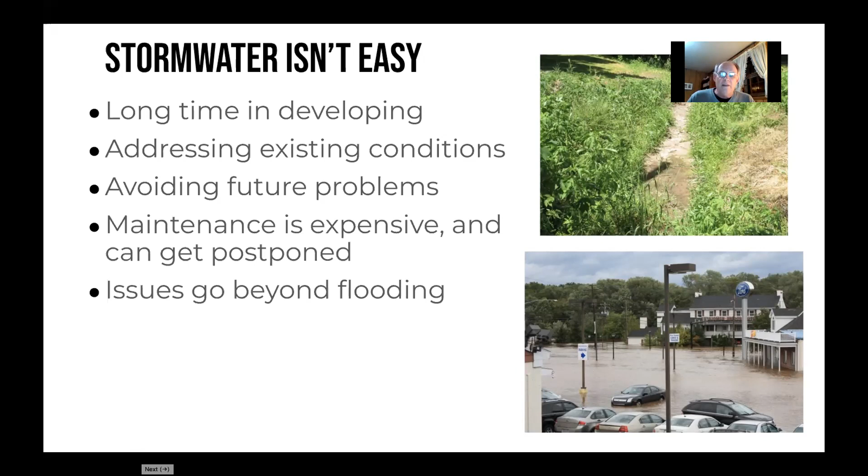And the issues go beyond flooding. The bottom picture there that you see, it's an unfortunate situation. Cars are in the floodwaters, buildings are in the floodwaters, but it goes beyond flooding and gets to the very hydrologic cycle, that water cycle that we all learned about in high school. The top picture is a stream. It's a small headwater stream, and there should be water in it, but there isn't because we're disrupting the water cycle with all of our impervious surface and the disruption to the land. And so we're creating a problem that's even bigger than just stormwater. Next slide, please.

So what is the problem? Let's get down to a basic question. What is stormwater? So we're all on the same page. We're talking about rainwater that runs off the land during and just after a storm. Can it be a nuisance? Yes. When flooding occurs, when our basement floods or the backyard is wet and mushy, yes, it can be a nuisance. Can it be a threat? Yes. When roads flood and emergency vehicles can't get through, or people can't get home from their jobs or get to where they're going, it can be a threat. And sometimes people drive through flooded areas and disasters happen.

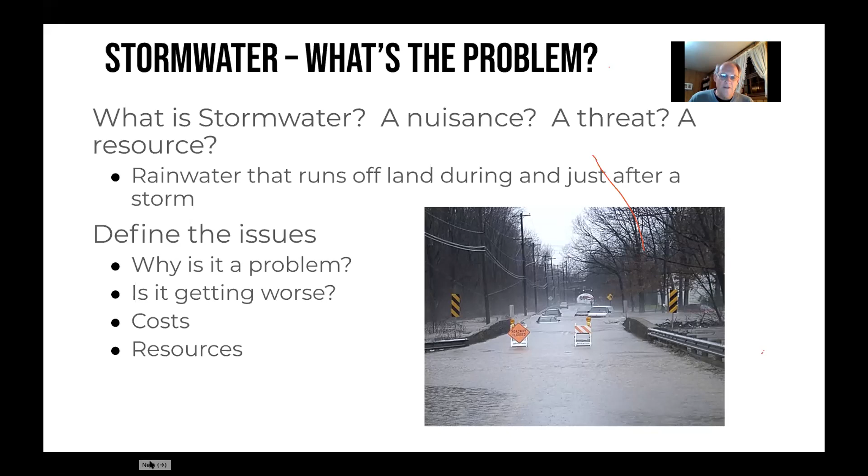So we can have some real problems relating to stormwater. But it's also important to realize it's a resource. This is the water that recharges groundwater, that keeps our forests alive, that ultimately becomes our drinking water. So I want to talk a little bit about why stormwater can be a problem, is the problem getting worse, and the costs involved. And on my last slide, I have a few resources for you to consider once we're done with the presentations. So next slide, please.

Right, these 4 pictures show a transition between the forest, I'm not sure where that red line came from, to an urbanized environment. Keep your eye on the horizontal arrow. That's signifying runoff. When rain falls on the land, it can go in 4 different directions. It can evaporate back into the atmosphere or be transpired through leaves of plants back into the atmosphere. It can soak into the shallow soil and be held in the spaces between the soil. Or it can soak deeply into the ground where it recharges groundwater, or it can become runoff.

In the forested situation, about 10% of what falls on the land can become runoff. As we move from that forested situation to a rural development, which is really low density, even so, runoff can double. We can have 20% of the rainfall running off the land from the hard surfaces that are represented by rooftops and driveways and roadways and sidewalks and so on.

Moving down to the suburban style development that we see so much of in Montgomery County, now runoff is about 30% of the rainfall. And this, again, is coming from all of the hard surfaces, even the lawns that developers put in. They're compacted, they're smooth. So everybody wants a nice looking lawn, but those lawns don't infiltrate a lot of stormwater, and it all runs off and becomes about 30% of the rainfall.

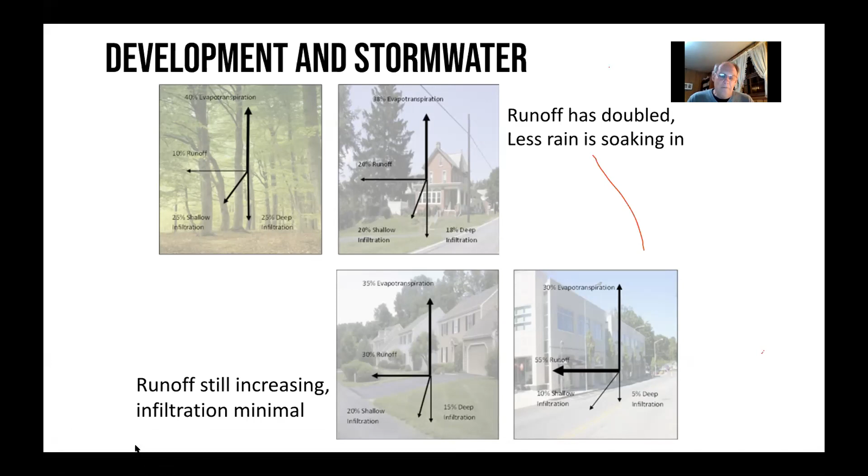I have an illustration. If you're not good with arrows, this should help. Keep your eye on the little red dot. This is a portion of, I think, Upper Dublin Township outside of Ambler Borough. This picture was taken around 1969, 1970s.

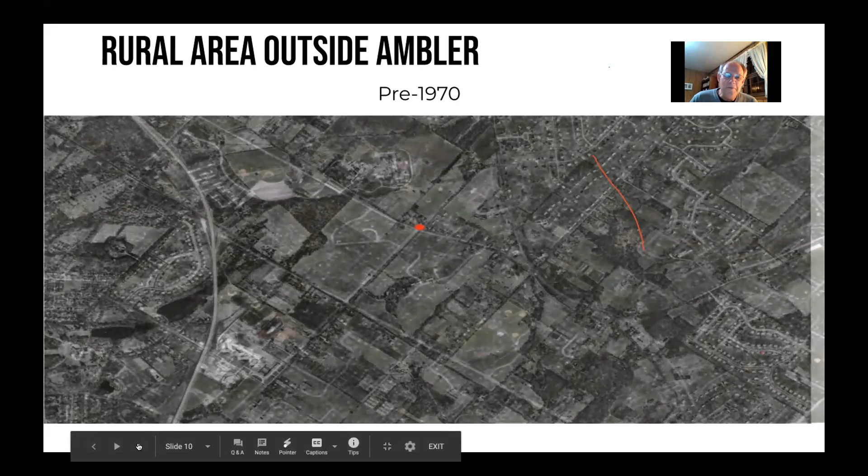Watch, it'll turn to our developed landscape that we see, and all of those roadways that appeared, all of those parking lots and rooftops and so on that appeared. They all generate stormwater. They all prevent rainwater from soaking into the ground, and they become runoff.

So the result is periodic flooding. It can be nuisance flooding, like road floods, roads being closed, or it can be catastrophic. We've had some tragic events in Montgomery County where people have been swept off of roadways or trapped in buildings, and they've died from floodwaters. And so flooding is nothing to be taken lightly. It's a very serious situation.

Let me just take a moment and ask you please never to drive into a flooded roadway, because disaster can happen. So we have loss of services, loss of property. People's yards get washed away, buildings get damaged, and the threat of loss of life. Even our emergency response personnel, when somebody gets stranded, they're there to help, but they're putting their lives on the line, and it's dangerous.

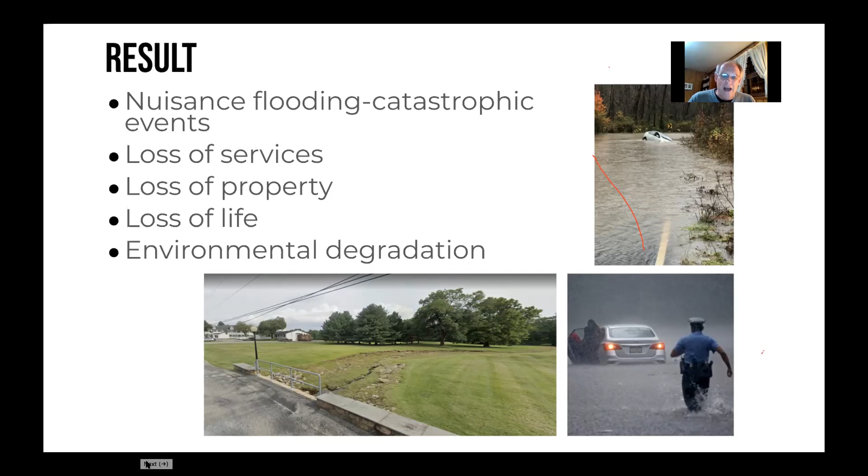That's not a healthy environment for anything. The fish, if there's anything that's living in there, they're stressed. There's no trees to shade the water. There's no vegetation on the banks to hold the banks in place. It's just a degraded environment.

Okay, so the question is, is it getting worse? I hear people all the time talk to me at work and they say it just seems like we're getting worse rainfall events. And they're right.

This map came out a few years ago. It shows from 1958 to present, the increase in heavy rainfall events. And that's my lifetime, I was born in 1959. So this is something that I've experienced, everyone's experienced. Look at Pennsylvania, 71% increase in heavy rainfall events during that time period. So it is getting worse, and we are seeing more flooding. It's not just your imagination.

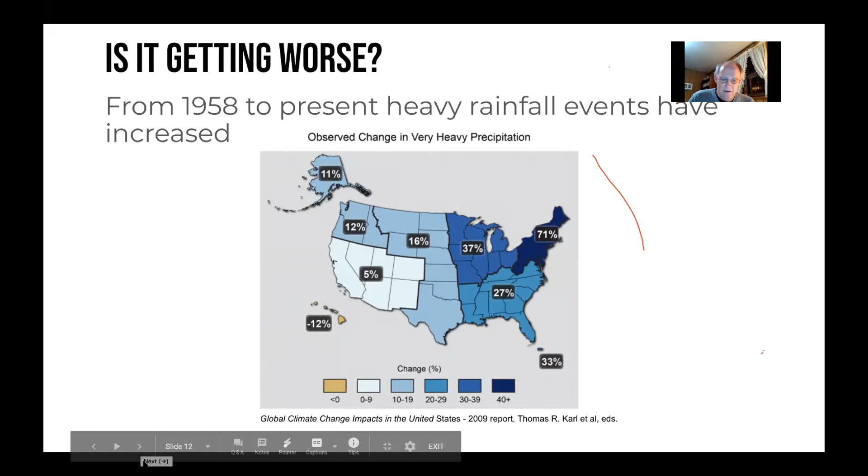And we all see these events. If you've got a smartphone and you're on some notification device, when a storm comes, your phone's going off every 5 minutes telling you about a flash flood watch or a flash flood warning. We see rainfall amounts on forecasts. Then after the storms, the media shows pictures of destruction, roads being washed away, culverts being undermined.

The PEMA, the Pennsylvania Emergency Management Agency, did a study a couple years ago and found that $125 million in damage was caused to public infrastructure by severe storms. That's not private property, that's public infrastructure. And nearly half of it was not covered by federal disaster aid.

So who covered that cost? Well, the local governments, local agencies, but ultimately you and I covered a fair amount of that with our tax money. And that's money that literally is down the drain. I mean, we could avoid that cost with some good solid planning.

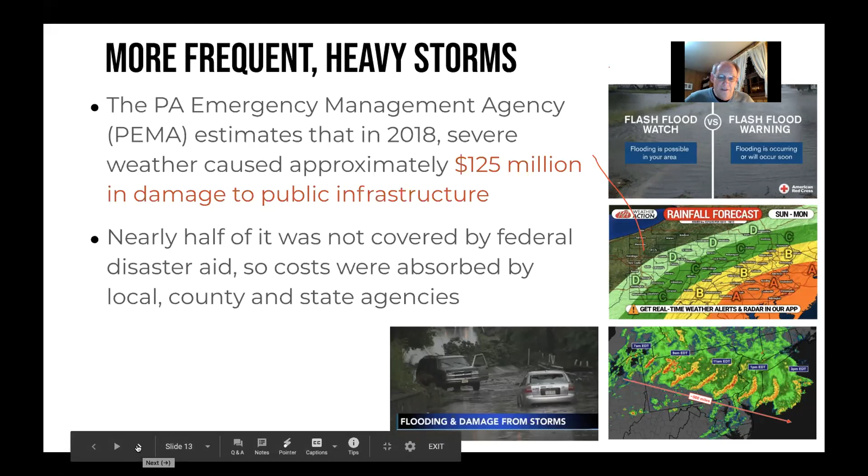More on the cost of stormwater. It's not just the facilities—they have to be inspected, they have to be maintained. Storm drains need maintenance; if they clog up, that'll result in flooding. New facilities need to be installed to correct problems as they come up.

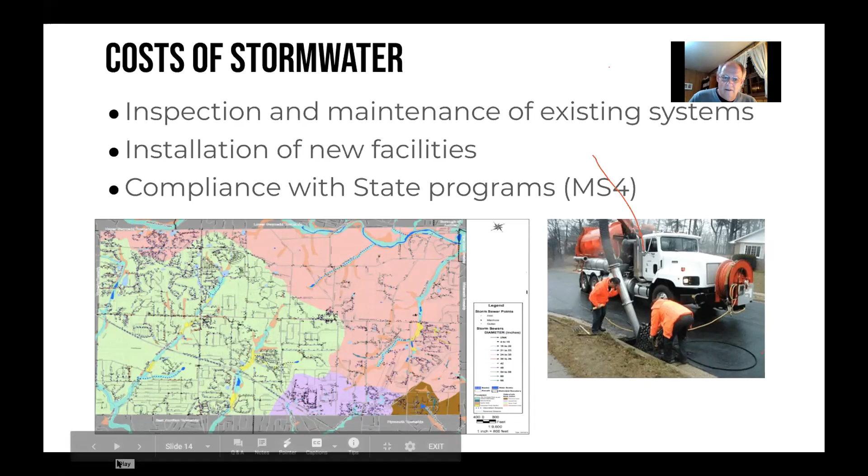Now, when I talk about costs, people always ask what's a rule of thumb. And I found there's no rule of thumb. You can't say it costs so many dollars per gallon of stormwater treated or whatever, because everything is different. The situation is different, the physical characteristics are different, and it's very difficult. But I have some cost figures here to give you a general idea of what we're looking at.

The EPA has looked at their MS4 program and found that developing the program across the country cost municipalities over $600 million nationally. That's an average of $140,000 per municipality. Now, of course, a small borough like Green Lane Borough or Red Hill didn't spend $140,000, but places like Abington Township or Lower Merion Township probably spent a lot more. And the annual cost of maintaining their program is approaching $1 billion nationally, which works out to about $230,000 per municipality. So it's an expensive program just to manage stormwater and meet certain requirements that the state is imposing.

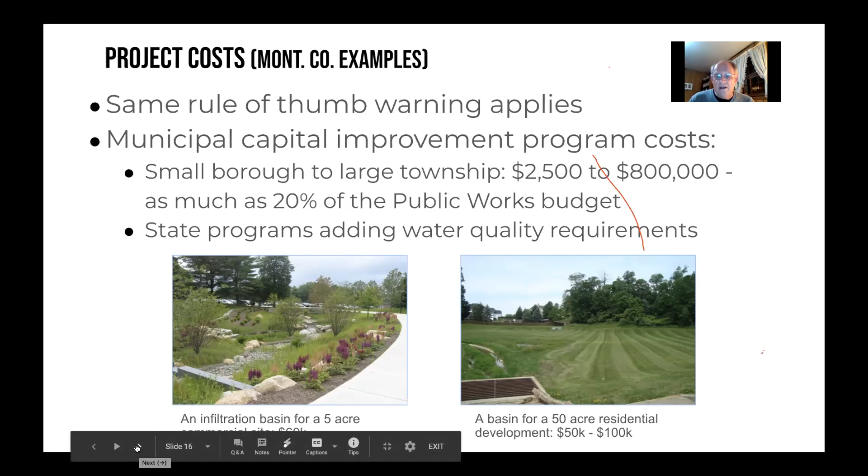To give you an idea of some projects, the bottom left picture is an infiltration basin for a 5-acre commercial site, and that costs about $60,000. The basin on the right is for a larger residential development, and that can cost up to about $100,000. So if a municipality is looking to correct the problem by merely putting in a basin, you can run into the tens or hundreds of thousands of dollars depending on the project.

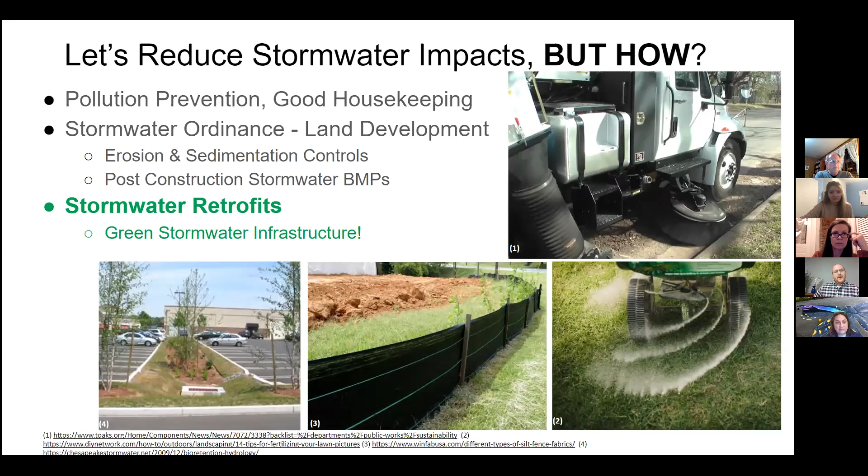But a lot of times these are out of our control. We might not want a lot of development, and we might not have control over the construction conditions. So for residents—and there are quite a few residents on the call—retrofitting is an option. You may convince your municipality, or you yourself might retrofit solely for the purpose of stormwater management. This is not based on land development; this is to improve the water quality and reduce flooding in your neighborhood.

So stormwater retrofits—commonly the term that is promoted for stormwater retrofits is green infrastructure. What I'd like to do is just present a few types of green infrastructure that either at the municipal level or the residential level are feasible to do. And to be honest, I have a great time building them and designing them for work.

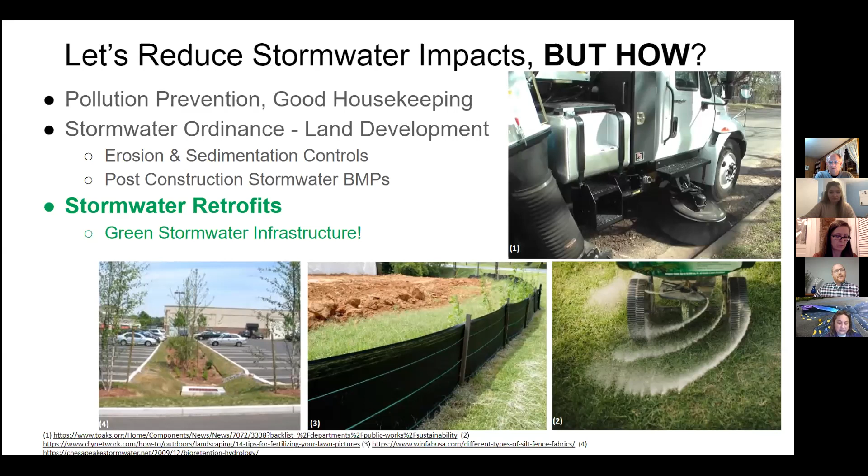So in these images on the slide, like I mentioned, street sweeping and reducing some of your fertilizer use—these are controls where we reduce the pollution in the runoff. Erosion sedimentation control, E&S control, and land development does impact stormwater, but not always in a negative way.

So I mentioned green infrastructure. So what is green infrastructure? For some it's a new term; for others, they've heard it before. If you've heard of stormwater best management practices or low impact development, these are really common terms and they overlap quite a bit. Green infrastructure is intended to be a stormwater management practice or control practice that uses or mimics natural processes. So if it's constructed of natural materials and follows the natural cycles, or at least if it mimics those cycles, it's considered green infrastructure.

Green infrastructure tends to get used as a term when there's more than just stormwater management as a goal. There's water quality protection, and in urban environments there's tree canopy and shading as a benefit. You might improve a streetscape in addition to managing stormwater runoff, or create some habitat for local wildlife. A lot of these are used for community amenities, either in parks or in educational settings. So green infrastructure is typically used as a description of something that has more benefits in addition to stormwater management.

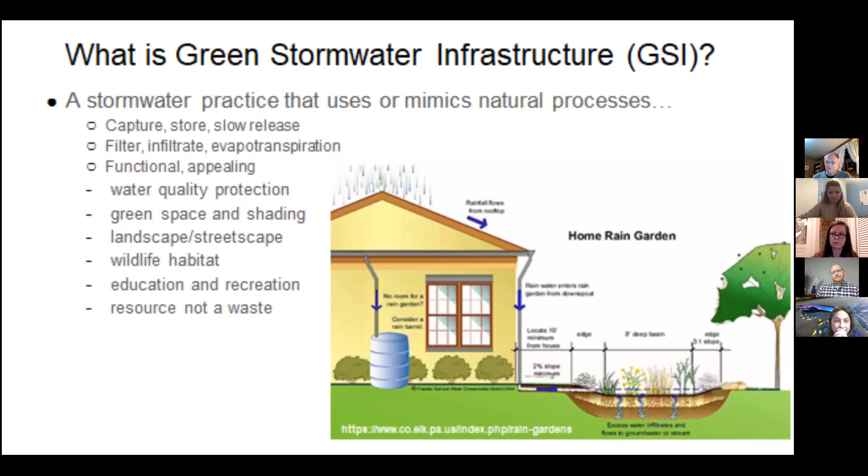So the question is, how do you design these, or what's the approach for green infrastructure and stormwater management overall? What we're trying to do for water quality is to manage the storms that happen more frequently and to manage the portion of a large storm that washes off most of the pollution.

But to really improve water quality and do our part, we're typically down to around an inch of rainfall. A 1-inch storm or slightly larger is 90% of the rainfalls you'll see in your year. And that's really where most of the pollution is coming from. And even slightly larger storms, that's mostly where erosion and your streams are being impacted. So we're not really talking 10-inch rainfalls or those real extreme events. Usually we want to target for green infrastructure these smaller events.

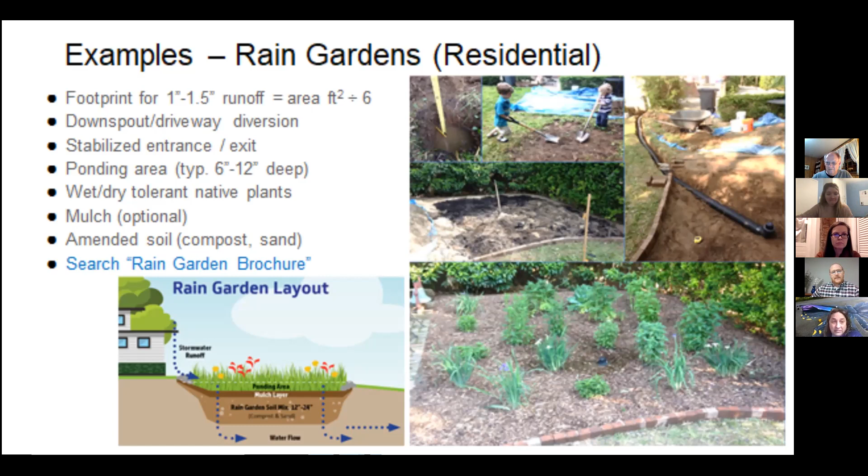Rain barrels are another really common one, and I'll try to speed up because I want to give our other speakers some time. But rain barrels are great. The only thing you have to keep in mind is the size of the rain barrel. If you have a roof that's maybe 10 feet by 9 feet, an inch of runoff from that roof would fill a 55-gallon drum. A lot of people think that they can hook up a rain barrel to a really large roof and accomplish the goal, but it's likely just to fill up with a very small rainfall. And so you may want a larger one. You may have a series of rain barrels, or one for each downspout.

The common concerns are mosquitoes, things like that. If you have a screen top, and a lot of these have screen tops, mosquitoes won't breed and cause an issue. You do have to have a way of draining it, and you have to consider what happens in the winter when you're not using the water from a rain barrel. You don't want it to freeze and break the rain barrel.

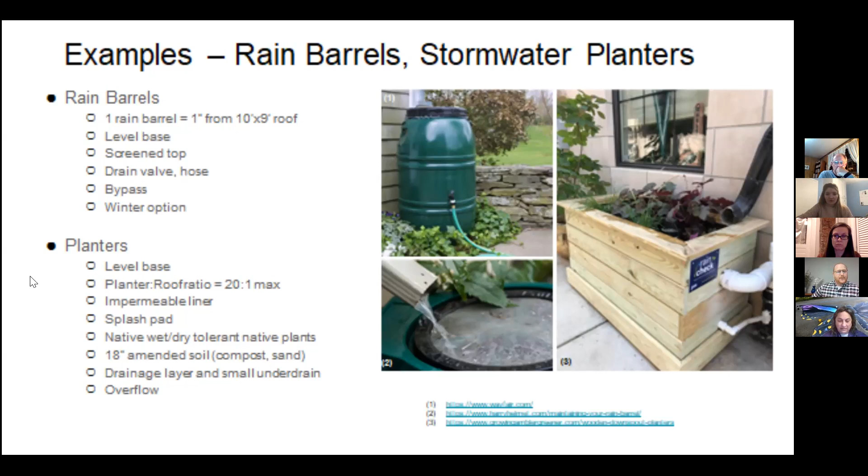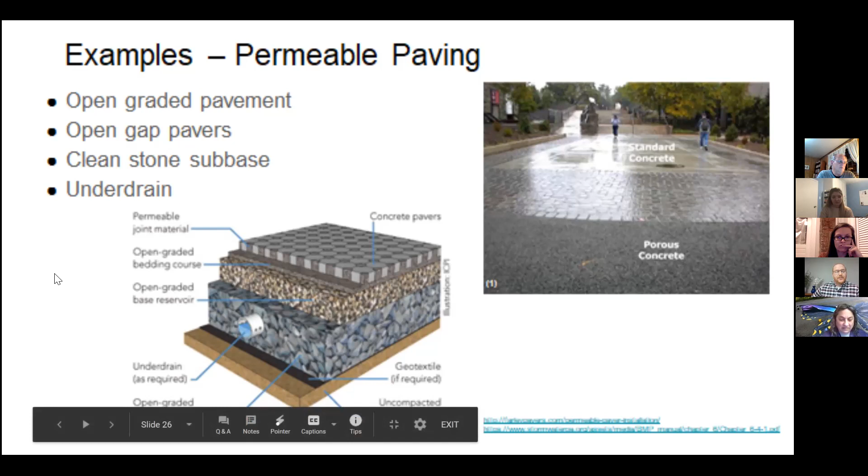So tips overall, hopefully this will be recorded and maybe we'll have some of this available to you later. I just want to make sure that you have fun when you're doing this. This isn't supposed to be complicated, right? Even at a township level, you should have fun. You should create a space that works for you and accomplishes the goal. For design considerations, just make sure that you have stable entrances and exits, because bigger storms will happen and you don't want to create a problem by trying to build a solution.

Select the plants, the type, the blooms and the seasonal variety that's appropriate for rain gardens. You want to plan for winter, make sure you have under drains if there are any draining issues, and provide a space and a means for maintenance. These aren't maintenance free, just like any garden. You have to get to it and you have to be able to maintain it without damaging it. So there's some planning involved.

Overall, I would say if you're looking for more information, think of the kind of stormwater practice and Google that or search that and brochure. There's a lot of community entities that are trying to educate you on how to do this at your home, so it's easy to find. And if you need any more help, I think you'll have my contact info. I'd be happy to help.

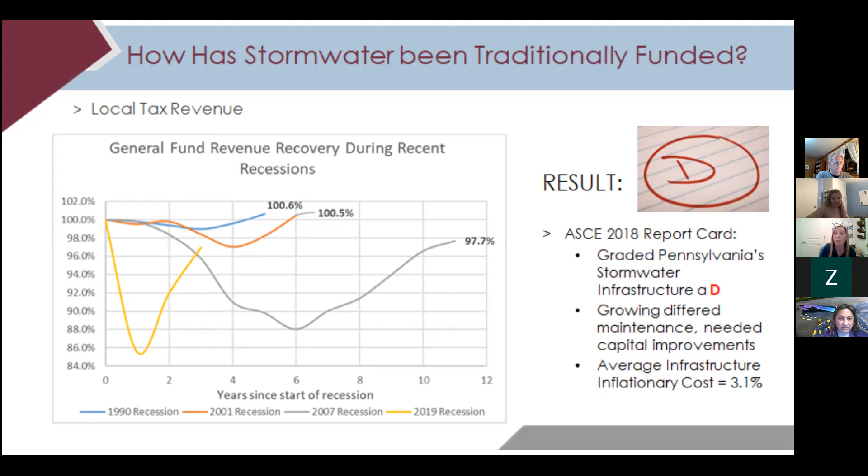Yet the average municipality collects less tax revenue to maintain infrastructure than they did before. The result is a lot of deferred maintenance. Drew mentioned that earlier in the presentation, and that includes stormwater infrastructure. In fact, the American Society of Civil Engineers graded Pennsylvania's stormwater infrastructure a D in 2018. Why? Because of the growing amount of deferred maintenance and the growing need for capital improvement projects. So where do we go from here? Next slide.

Well, municipalities throughout the United States have turned to stormwater utilities. They're a mechanism for meeting the funding gap, and they're a growing trend, especially now in Pennsylvania. Western Kentucky University periodically surveys stormwater utilities, and they're estimating that there's over 1,800 in the United States. They've continued to grow over the past 5 decades due to increased regulation and significant precipitation events, especially those causing flooding.

Pennsylvania was a little late getting to the party. We didn't have enabling legislation until 2016, which gave municipalities the ability to transfer stormwater program management activities to a municipal authority and for the authority to charge a stormwater fee. In recent years, I've worked to implement stormwater utilities benefiting over 50 municipalities in Pennsylvania, and year after year, the number of stormwater utilities in Pennsylvania seems to double, even last year during COVID.

Next slide, please. So how does a stormwater utility work? Well, the long-term needs of a municipality are evaluated. That includes stormwater problems like flooding, the need to replace aging infrastructure, regulatory requirements, polluted streams, and the desire for green infrastructure. The priorities of the community are considered.

These are things like public safety, improving water quality, protecting property values, and the like. And then that's used to consider the long-term cost of stormwater management for the community and how to meet those goals in a low-cost yet effective way. Those costs are then allocated to all developed properties in the municipality in the form of a stormwater fee.

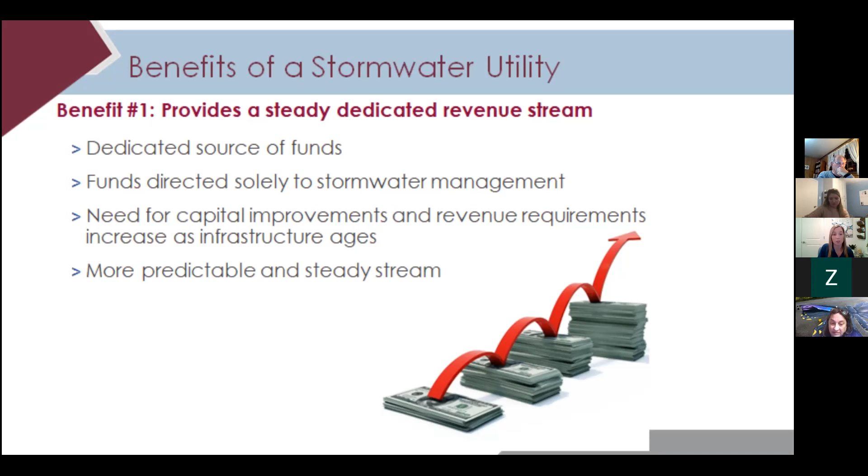Another financial reason is that stormwater fees are more equitable than a property tax. That's because rates are based upon a property's impervious area. Impervious area are surfaces where stormwater can't infiltrate. Instead, it runs off. So it includes things like building footprints, asphalt, concrete, and the like. And studies show impervious area is the best correlation to the quantity of stormwater runoff or the quality of runoff generated on a property. Much better correlation than assessed property value.

You know, it's possible to have a skyscraper and a parking lot with vastly different assessed property values but the same impervious area footprint. So they generate the same amount of stormwater runoff, but paying through taxes would be inequitable. One would pay much more than the other. Another way in which stormwater fees are more equitable than property tax is that all property owners with developed land pay for stormwater, even tax-exempt properties.

If you think about tax-exempt properties in a community, it would be schools, universities, hospitals, churches. If we think about those types of properties, we think about large buildings and large parking lots. So typically they're generating a lot of stormwater, but they're not paying for it since they're tax exempt. So with a stormwater fee, for-profit businesses and residents don't have to shoulder the cost burden of stormwater alone.

These two reasons result in a significant cost savings to residential users. As I stated on the previous slide, we did a survey of the 50 municipalities where we've implemented stormwater fees, and the average residential property owner saves 40 to 70% by paying a fee instead of paying for stormwater through taxes. Next slide, please.

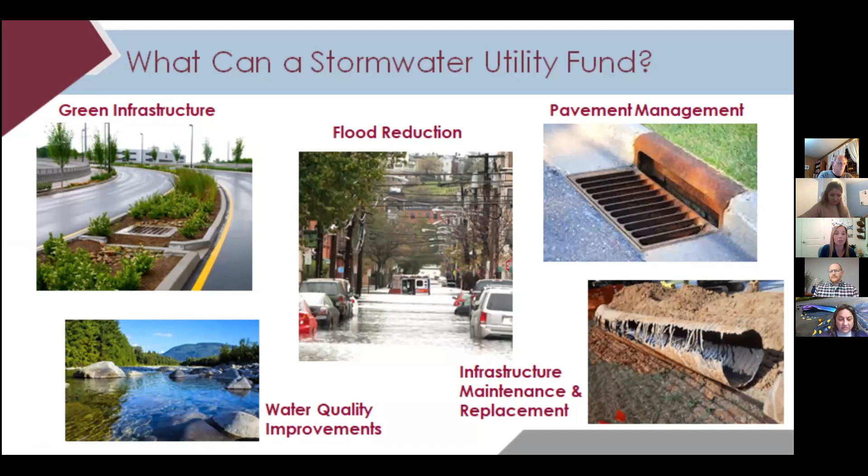So how can a stormwater utility really benefit the community? What can a stormwater fee be used to fund? Well, for starters, each of the items on the slide: green infrastructure projects, flood reduction, pavement management, improvements which result in better quality of water in lakes and rivers, maintenance of stormwater infrastructure. Each of these things have the added benefit of improving the community, bolstering economic development, increasing property values, and ensuring that where you live, work, and play continues to thrive for years to come. Next slide, please.

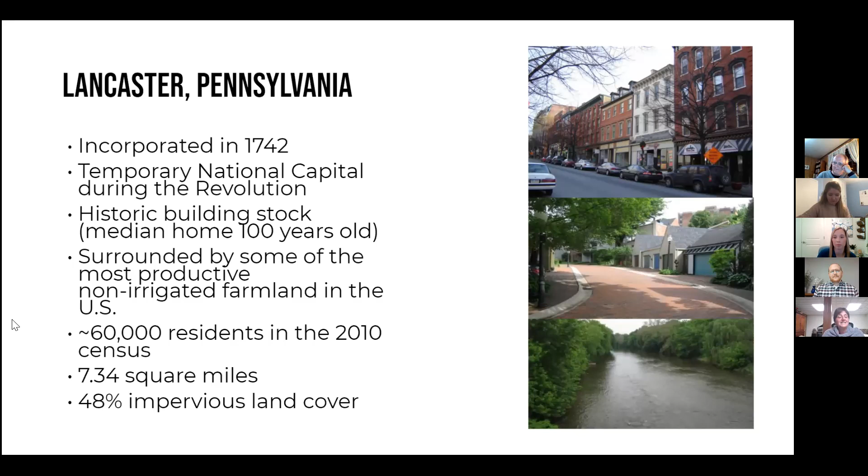The first thing we took a look at when we started thinking about how we could collaboratively address stormwater management in an integrated fashion in the city was our goals. If you're a municipal official, a planner, a county official, or even a resident, you know that municipalities really like to plan. And planning is good - when you plan for success, you obviously want to follow through with that.

So we had a number of plans on hand already, and we took a look at those and came up with the idea of developing a comprehensive green infrastructure plan with the goal of being sustainable - including financial sustainability, which led us to implementing a utility and a stormwater fee, incorporation of green stormwater infrastructure into our plans, ordinances, and codes, as well as integration with all of our construction and reconstruction projects, including some of those capital improvement projects others have mentioned previously.

One thing I'd like to mention that hasn't really been mentioned yet is our urban forestry plan. Urban forests can provide additional stormwater management as well as additional co-benefits to the municipalities where they are implemented. And they can also be credited towards stormwater management obligations as well. Next slide.

Once we had our plans finished and started thinking about how we might implement them, we started to think about how we wanted to perform our design. In Lancaster City, there were a number of different factors that would go into what might push a design towards bid and construction. Generally, these were the four criteria we looked at in terms of most cost-effective design and implementation of green infrastructure.

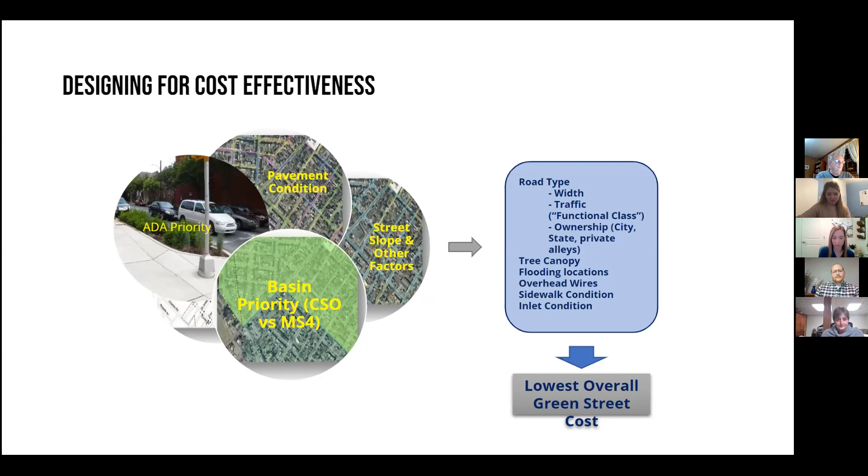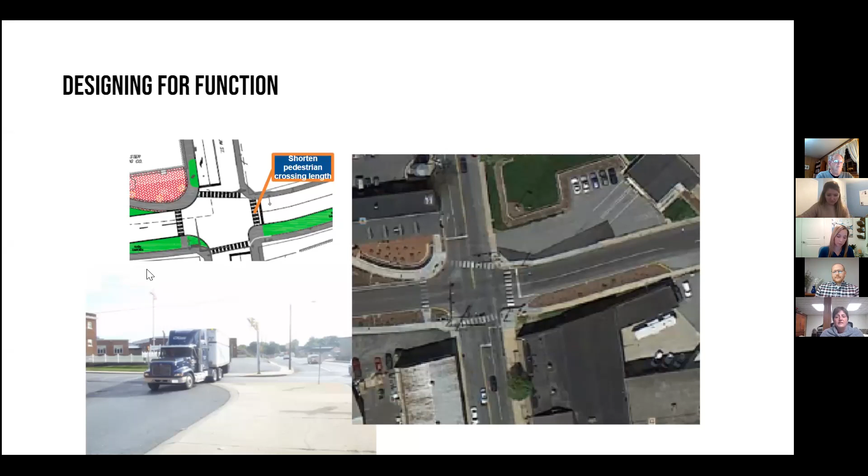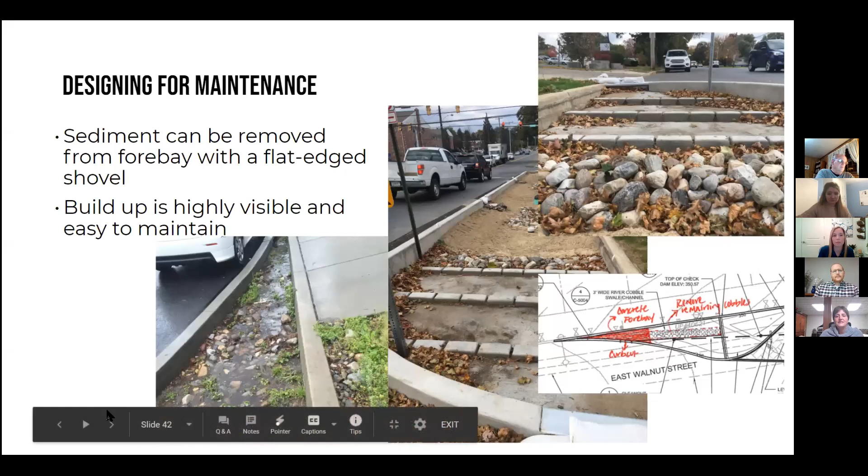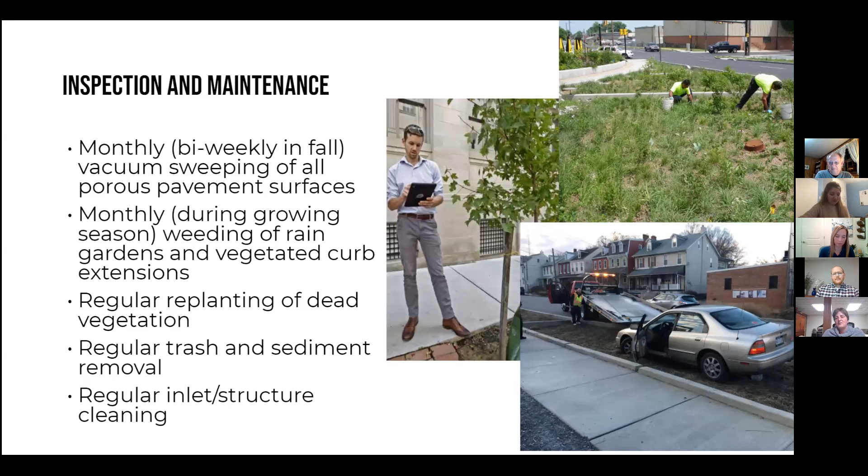That would also fall under the good housekeeping procedures mentioned earlier - making sure staff know how to clean up if there were potentially a fuel spill.

Finally, before I close, one of the things Lancaster City could not have done any of this without is public engagement and partnerships. At every opportunity, we had to have public support for everything we were doing. We did a lot of outreach and engagement with the public before we instituted the utility and the stormwater fee. We offered workshops to contractors when we began updating our ordinances and regulations. We incorporated public art to bring attention to stormwater practices being incorporated as part of capital improvement projects. We engaged the public in an adopt-a-BMP program so we could save on maintenance costs and get extra eyes on the ground to make sure our practices were maintained when needed. We also partnered with local organizations, conservancies, and watershed groups to help promote the program and emphasize the success we were having.

In this case, as I'll close - I can't stress it enough - teamwork makes the dream work. Residents, elected officials, planners, engineers, volunteer organizations, watershed associations, and other organizations like the TTF partnership are vital to making things work in a municipal structure.